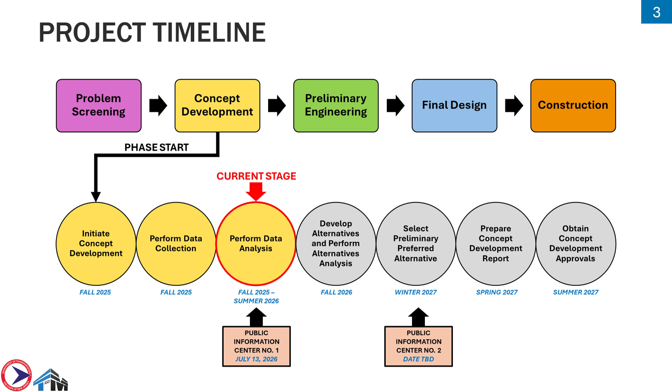The project limits include a 2.38-mile segment along Route 35 extending from Barnegat Avenue to West Channel Way. In this area, Route 35 operates as a one-way pair with residential and commercial uses along Route 35 northbound and residential uses along Route 35 southbound.

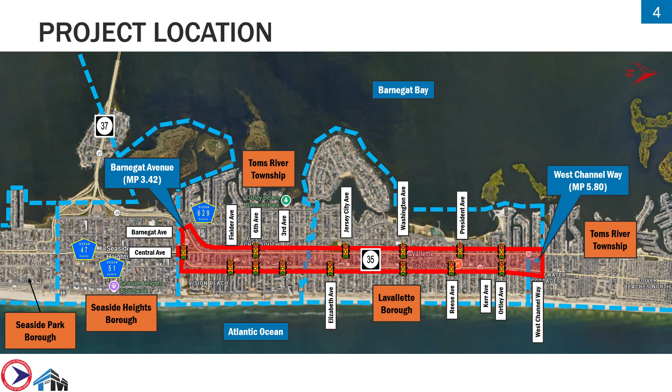The purpose of this project is to improve safety and reduce crashes for all roadway users by addressing documented safety issues and enhancing pedestrian and bicycle accommodations. The corridor has a high frequency of severe crashes, including a pedestrian fatality in the past 5 years, and part of the study area is identified on NJDOT's Target Zero Commission High Injury Network.

The project's primary objective is to implement safety countermeasures which address existing deficiencies and make the corridor safe for all users.

Traffic volume data was collected along the corridor. Route 35 northbound and southbound both experience an average daily traffic volume of approximately 7,100 vehicles per day during the summer. A typical signalized intersection along the corridor experienced approximately 2,200 pedestrian movements and 675 bicycle movements over a 12-hour period on Saturdays during the summer season.

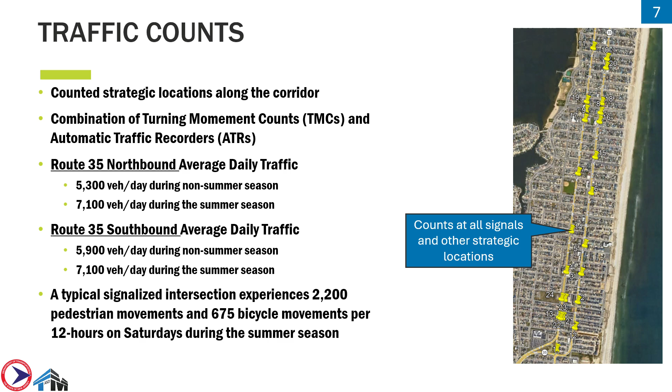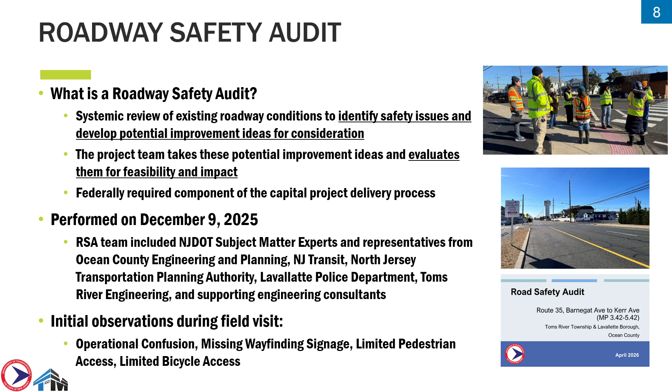A roadway safety audit was conducted as part of this project to identify safety issues along the Route 35 corridor and develop recommendations for improvement. The audit, completed on December 9th, 2025, included NJDOT staff, local agencies, and other transportation partners. The road safety audit identified several key safety concerns and provided recommendations that are being evaluated by the project team to help develop the proposed improvements for the corridor.

Crash data was analyzed as part of the roadway safety audit. The analysis found that the corridor experiences nearly 3 times the statewide average crash rate for similar roadways. It also identified elevated pedestrian and bicycle crashes, including one pedestrian fatality and numerous crashes resulting in major or moderate injuries.

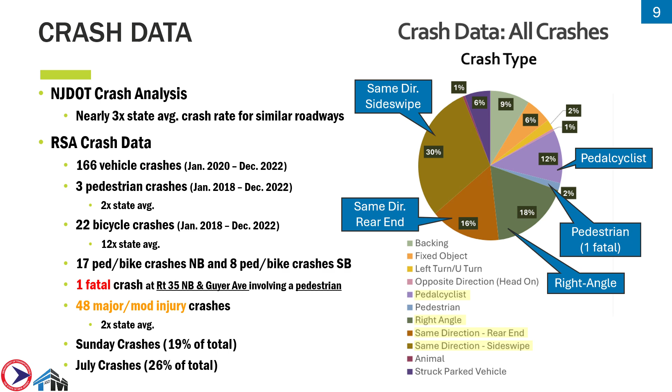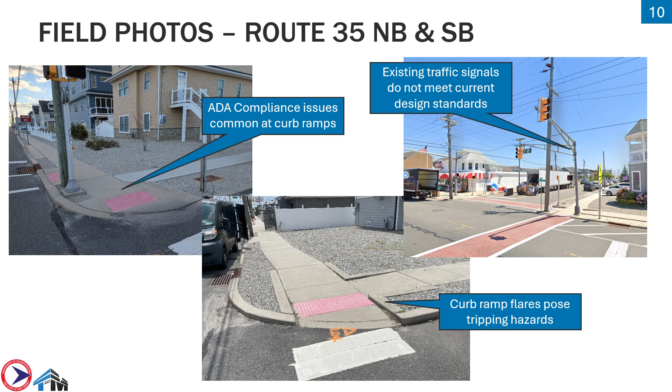Field observations are carried out on all projects to capture and document existing conditions of concern. These photos focus on compliance issues, sight distance, and pedestrian access concerns.

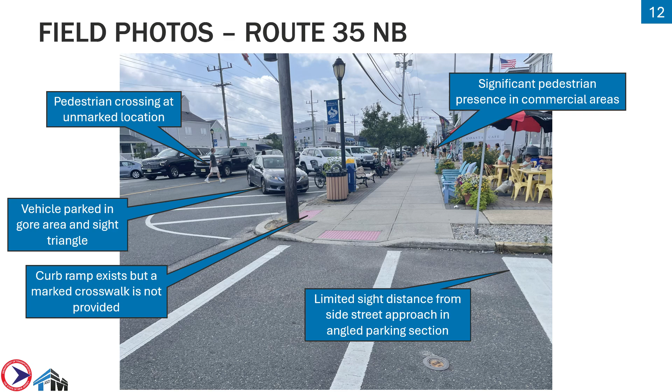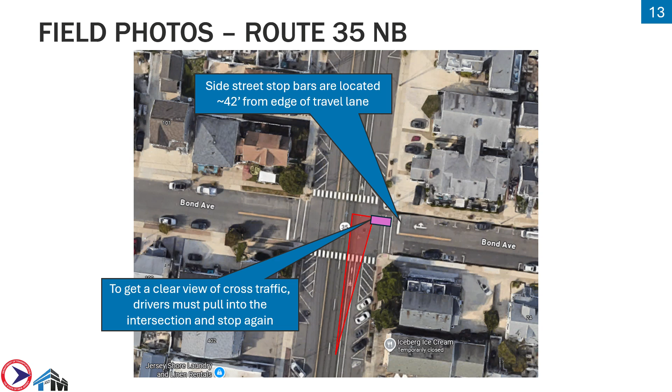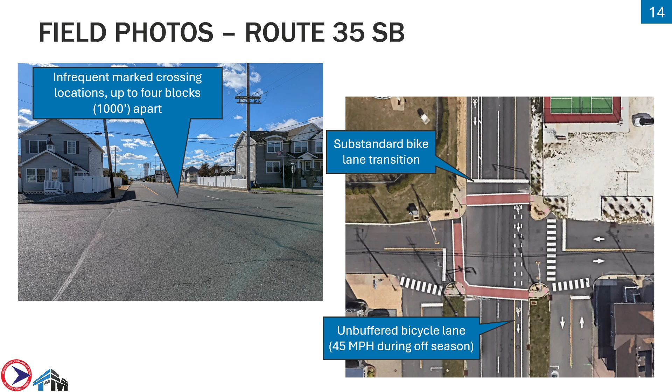The existing conditions data analysis and field observations were ultimately used to develop a list of focus areas. These focus areas will be further evaluated with public input and used to develop a preferred alternative, which will be shared in the future.